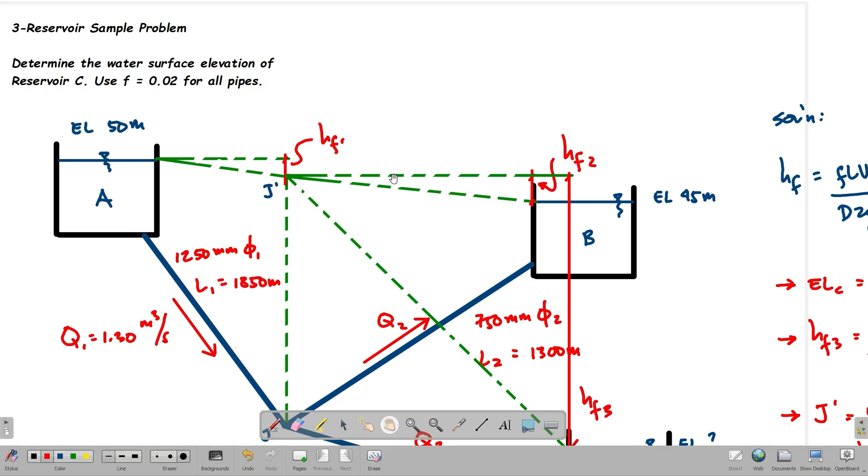So, ibig sabihin, pag binigay yung friction factor na f, yung gagamitin natin dito na equation for head loss is the Darcy-Weisbach equation, which is madidiscuss natin mamaya. So, ito yung figure natin.

We have 3 reservoirs, A, B, and C. Tapos, given yung elevation ng A, tsaka elevation ng B. We have 50 meters sa A and 45 meters dito sa B. Pero, unknown yung elevation C.

Given din yung details ng pipes natin. So, for pipe 1, we have 1,250 millimeters na diameter. Tapos, length naman is 1,850 meters. Tapos, dito naman for pipe 2, we have 750 millimeters. Tapos, 1,300 meters yung length.

For pipe 3, same lang sila nung details nung pipe 2, 750 yung diameter, tapos yung length naman is 1,300. Meron din dito yung direction ng flow. So from reservoir A pupunta siya ng junction, tapos madadivide siya into pipe flow papunta sa reservoir B, tapos flow papunta dun sa reservoir C.

And then given din yung flow rate ng pipe 1, which is from reservoir A papunta dito sa junction J natin. Okay? So we have the following lines. We have the blue line, the green line, and the red line.

So yung green line natin, ito yung energy grade line na representing the energy from reservoir A to B and C. Tapos yung blue line naman, yun yung mga actual pipes natin. Magmi-meet yung 3 pipes natin sa junction J, tapos madadistribute na yung flow ng reservoir A papunta dun sa B and C.

Dito sa figure natin, makikita natin na the difference between the elevation ng energy at reservoir A and yung energy naman at junction J is just the head loss ng pipe 1, which is HF1.

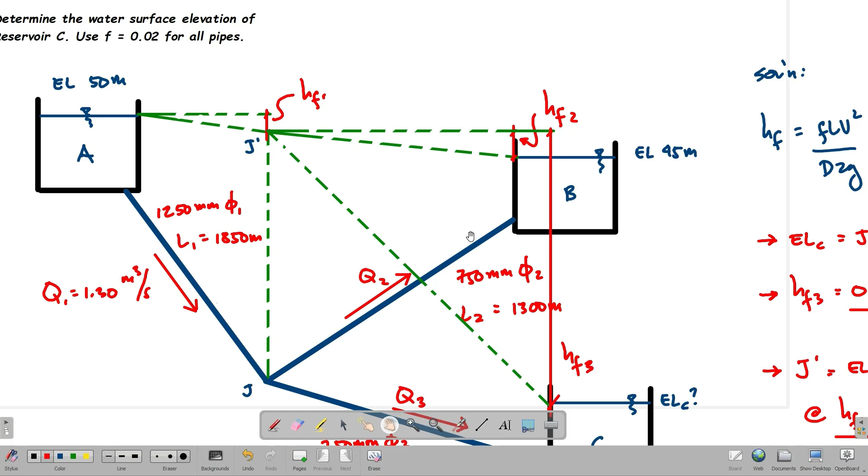Similarly, yung difference ng energy at junction prime tsaka energy ng reservoir C is just equivalent to the head loss, HF3. So yun yung nawalang energy as the liquid is flowing from the junction papunta dun sa reservoir C tsaka papunta dun sa reservoir B.

Okay? So para makuha natin yung elevation C, kung titingnan natin dito sa figure, since ito yung difference ng energy from the junction prime papunta dito sa reservoir, yung elevation C natin is just actually the difference between junction prime and the head loss.

So ito yung equation niya. Elevation C is just kung ano yung energy dito sa junction prime minus HF3. Okay? Tapos saan natin nakukuha si HF3? Dun sa equation natin ng Darcy-Weisbach. So ito yung general na equation, fLV squared over D2g.

Pero kung yung velocity ay gagawin natin Q, tapos i-evaluate natin yung mga ibang parameters like pi and 2g, ito yung makukuha natin na factor 0.0826. So this is only applicable for SI units.

Bali shortcut na to para hindi mo na laging susulat yung pi over 4 tapos yung 2g. So ito yung equation natin kapag na-evaluate na yung mga ibang given na parameters. Okay? Ito yung equation ng HF3.

Tapos hindi rin given yung Q3 kasi Q1 lang yung given. So, saan ba natin pwedeng kunin yung Q3? Dito sa baba, sinulat na natin, that at the junction, Q1 equals Q2 plus Q3, kasi madi-divide yung flow natin from Q1, magiging Q2 and Q3 na siya. So, dito natin siya makukuha.

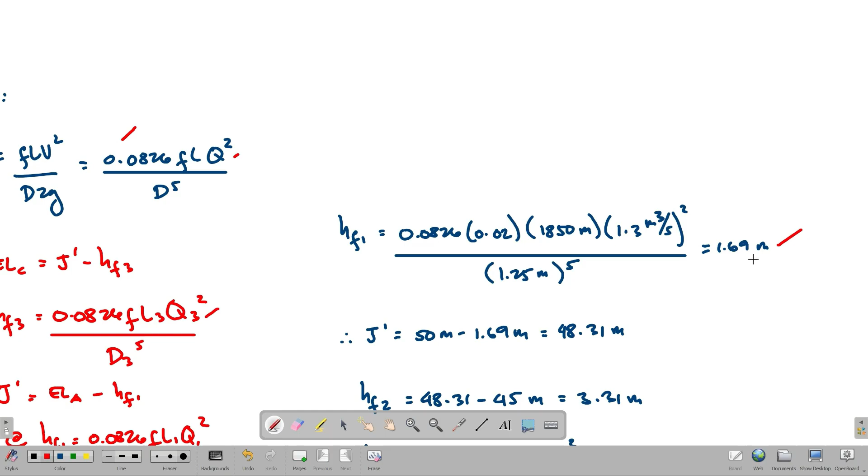So, therefore, makukuha natin si J prime as the difference lang: 50 minus 1.69. Confirm ulit natin sa calculator. 50 minus 1.69, that's 48.31. So, that's confirmed. Okay, so J prime, this is just the elevation ng energy. So, we have 50 minus HF1 na 1.69, you have J prime.

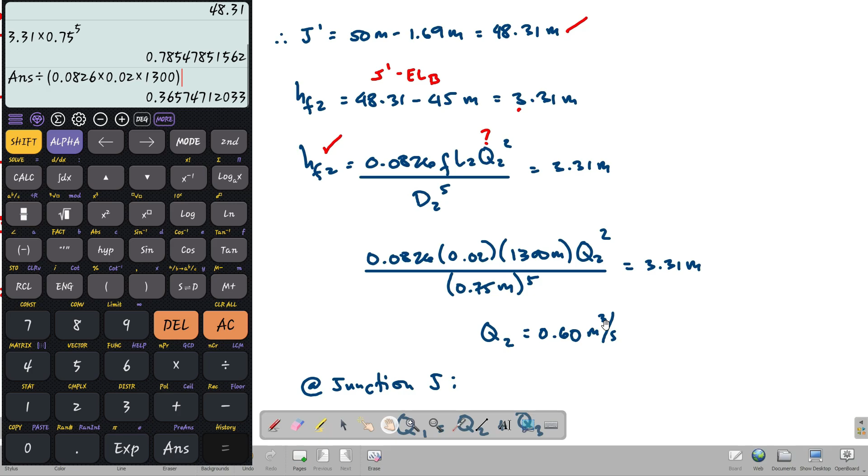So, i-confirm lang natin. So, that's 3.31 times 0.75 raised to the power of 5 divided by 0.0826 times 0.02 times 1,300, tapos square root ng answer. So, we have 0.6, na tama naman. So, confirmed na rin tong Q2 natin, which is 0.6 cubic meter per second.

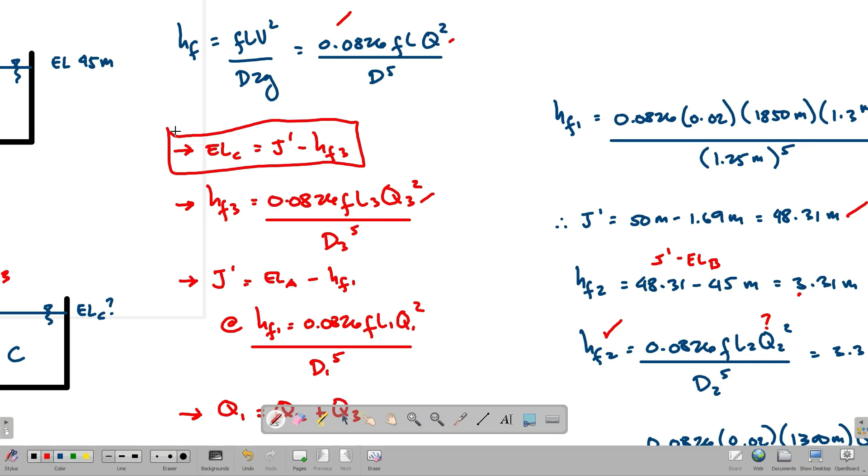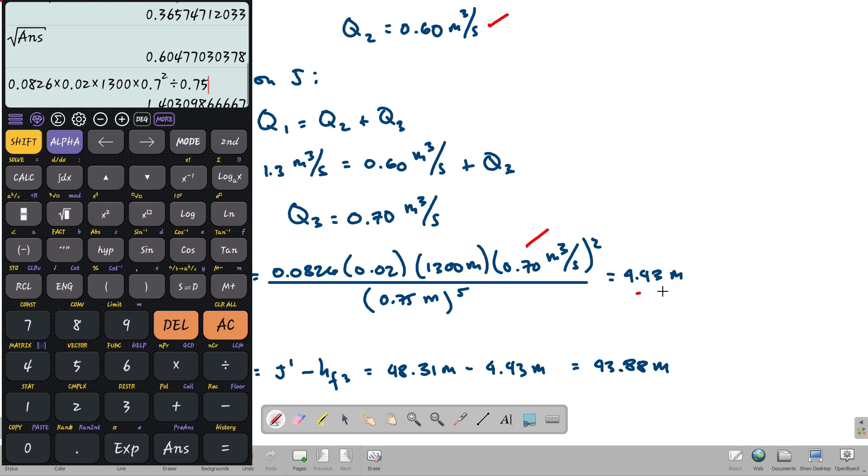Tapos, substitute natin yung Q3 dito sa equation natin for head loss 3. So, makukuha natin si head loss 3 as 4.43. Pero i-confirm pa rin natin. 0.0826 times 0.02 times 1,300 times 0.7 squared divided by 0.75 raised to the power of 5. That's 4.43 yung head loss niya.

Tapos, para makuha natin si elevation C, J prime lang, which is nakuha natin kanina, and then we have head loss 3, which is nakuha natin ngayon. So, we have 48.31 minus 4.43. That's 43.88 meters. So, ito ngayon yung elevation ng reservoir C.